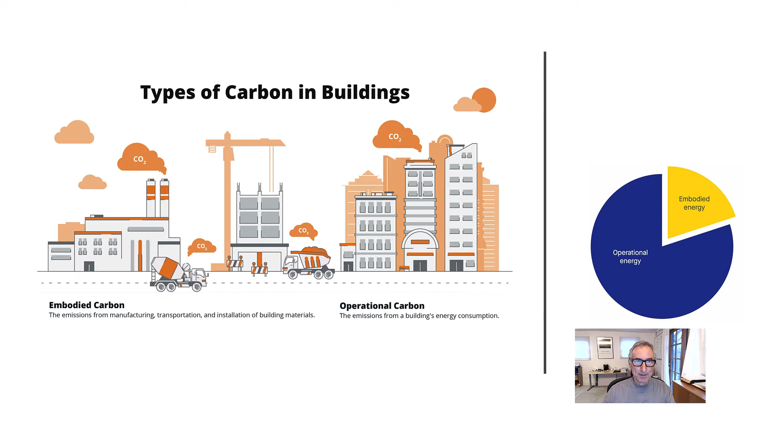In buildings, there are two sources or types of carbon emitted. One is from the construction of the building itself, which we call embodied carbon. The other is operational carbon, from the emissions of using energy in the building, either by burning natural gas for heating or using electricity created from fossil fuels. We're going to talk about both today.

Let me start with embodied carbon. It can be handled by looking very carefully at the building materials. We often find that the structural system is the single largest cause of embodied carbon. So when looking at buildings, we can investigate concrete, steel, and wood or other structural systems and calculate their embodied carbon.

You can see in this example for a 175,000 square foot office that embodied carbon can start around 30 million pounds for concrete, go down to the low 20s for steel, and below 20 for wood. In fact, wood itself sequesters carbon, and some people argue wood could even be a negative carbon impact.

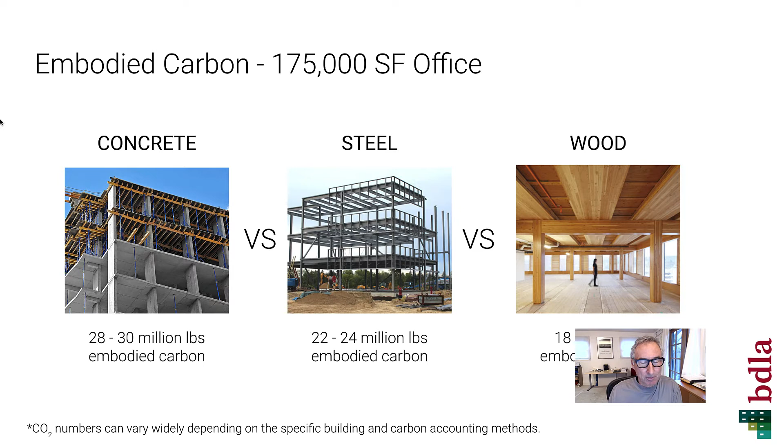If we're working on a building that has to be concrete or steel, there are steel and cement companies now making products with very low embodied carbon. They're consciously trying to figure out how to make cement that emits less carbon. Some companies are offsetting by running their operations with renewable energy, or, where fossil fuels are still needed for the process, as with cement, making sure they offset the carbon emitted in making it.

So generally, what we're doing to decarbonize embodied carbon in buildings is selecting low carbon building materials. At the end of the day, it's hard, if not impossible, to fully eliminate this carbon. So most projects take the remaining embodied carbon of the building construction and buy certified carbon offsets, ones that result in more renewable energy production, improved energy efficiency in buildings, and other benefits.

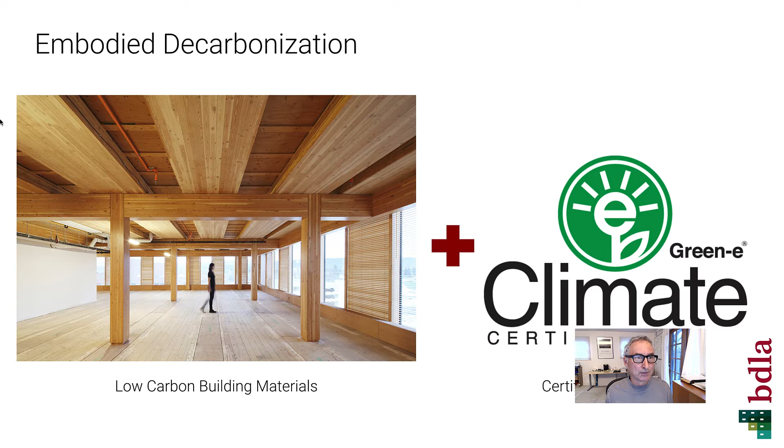So offsets are a way to do this. It's not as good as lowering the carbon itself in the building, but when it's a quality offset, it's considered a valid way to handle or decarbonize the embodied carbon of a building.

I'm going to spend the rest of the time talking about operational carbon, because it's the bigger of the two, and it's something we now have a clear path to handle. So what is the path to decarbonizing buildings?

If we look at a typical building, the first step is making that building more efficient. That more efficient building will still be served by methane, also known as natural gas, as well as electricity.

Then we take that efficient building and make it an all-electric building, substituting natural gas heating with electric forms of heating, generally heat pumps, which I'm going to talk about. Once we have an all-electric building, we can serve it with renewably produced electricity.

When I say renewably produced electricity, I mean solar or wind power. The solar can be put on the building itself, or we can purchase solar or wind power off the grid.

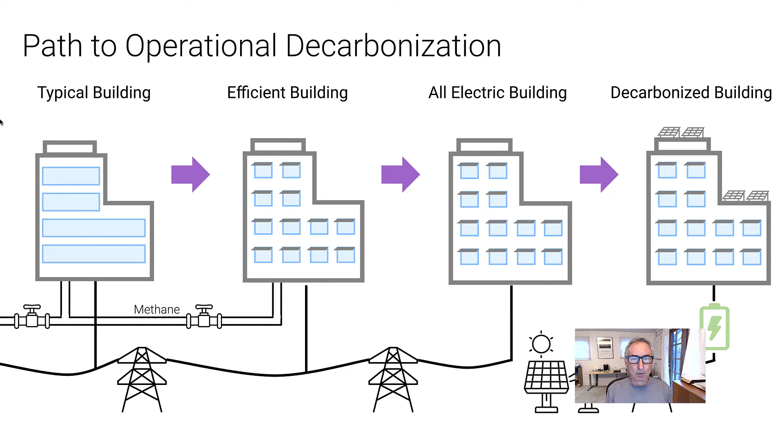So it's interesting on the building energy efficiency first step in this path. Buildings are generally getting more and more efficient. This is a graph showing that building stock has been increasing and is envisioned to increase. This is for the U.S. But the energy efficiency, measured in kilo-BTUs per square foot per year, has been improving over time.

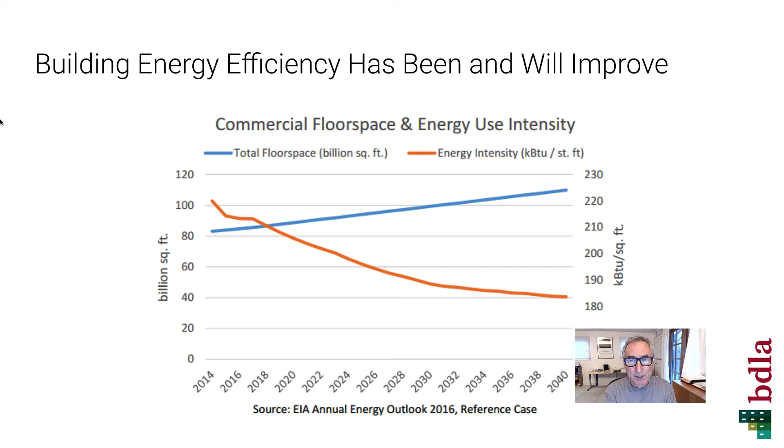And this graph on the left is up until 2021, actually measured data, or 2020, and then the rest is projected. There's been many years and lots of information available on building energy efficiency, but I'm going to focus a little bit more on some of the other elements today.

The first thing to understand is that carbon-free electricity is becoming more and more available. 170 cities in 8 states have already committed to providing 100% carbon-free electricity by 2050 or sooner. And several states are in discussion of being able to create or offer that.

One state, just as an example, that has not made a commitment like that is North Carolina. But in North Carolina, you can, through the electric utility Duke Energy, purchase renewable electricity. Most states and most utilities have an option where you can purchase renewable electricity. Some states have a program called community choice aggregation, which makes that easier, but we're seeing this as a rapidly growing thing—so that the money you pay in your bill, part of it pays for the wires and distribution of electricity, but the part that pays for generation goes to solar or wind farms.

So how do we electrify buildings, and what does that mean? Well, it's actually fairly straightforward. There are 3 places where we're using fossil fuels in buildings that we need to electrify. The first is space heating, and that's the biggest. The second largest is domestic hot water heating, and the third is gas cooking.

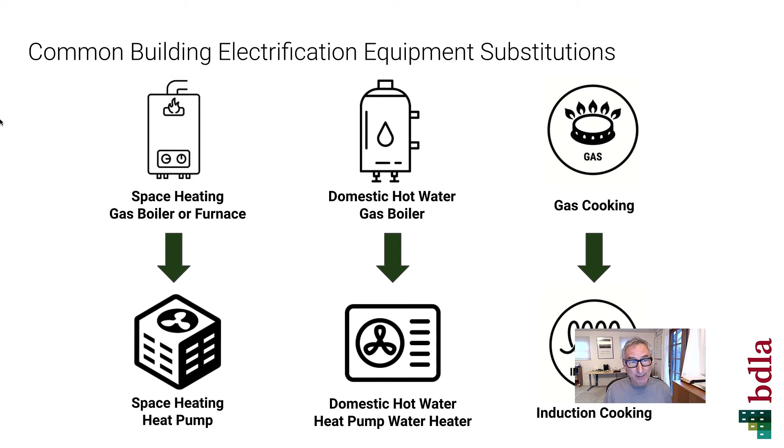There's also historically been electric resistance cooking, where the surface gets hot and you see a red element glowing when it's heating. But induction cooking is the newer version of electric cooking—it uses a magnetic field, and the surface doesn't get hot, the pot gets hot. It cooks very quickly and precisely, and it's the most efficient way to cook, around 80% efficient, where gas cooking is only 30 to 40% efficient.

So jumping into this idea of heat pumps: with a boiler, we burn gas. Some of the heat gets lost in the exhaust, and the rest provides heat. So for every unit of heat that goes into a building, we have to put in, on average, around 118 units of energy, fuel, in the form of natural gas.

With a heat pump, we use a refrigeration cycle, the same way your air conditioner or refrigerator works. A heat pump is able to pull heat from the air, the surroundings, and with the refrigeration cycle, turn what might often be cold outside air into higher temperature heat, and provide that into the building as heat. And because it's just moving heat, for every 100 units of heat we need to provide to the building, we only need, on average, about a third of that—33 units of electricity in.

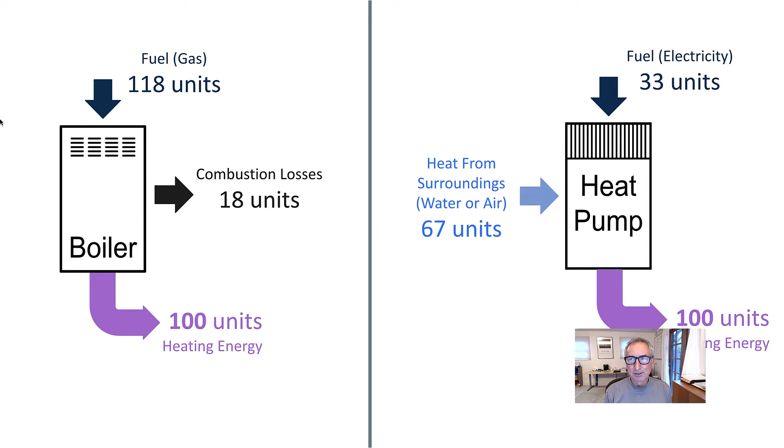So heat pumps are significantly more efficient. When we look at the resource-to-room efficiency of a heat pump: when we're using natural gas and burning that in a building, again it's this 118 units in for 100 units of heat out. But if we're using natural gas in a power plant and then put that electricity produced in the power plant into a heat pump, we only need 74 units of energy in. So natural gas is actually better used in a power plant connected to a heat pump.

But really the best by far is when we use renewable electricity—renewably generated electricity in the form of solar or wind—and we deliver that to a building and use a heat pump. In that case, we only need 35 units in.

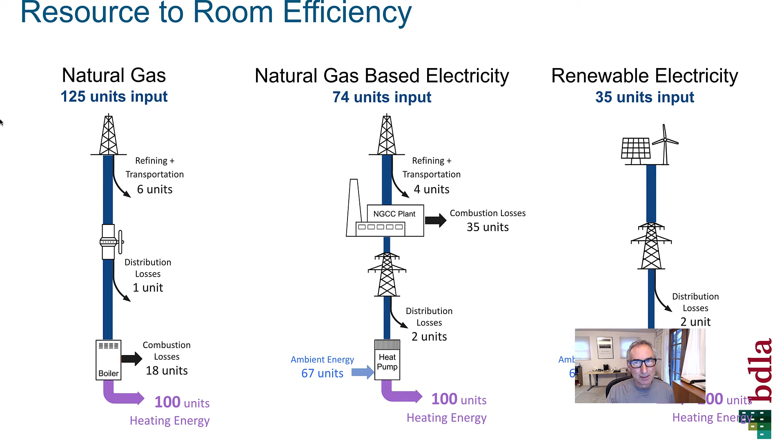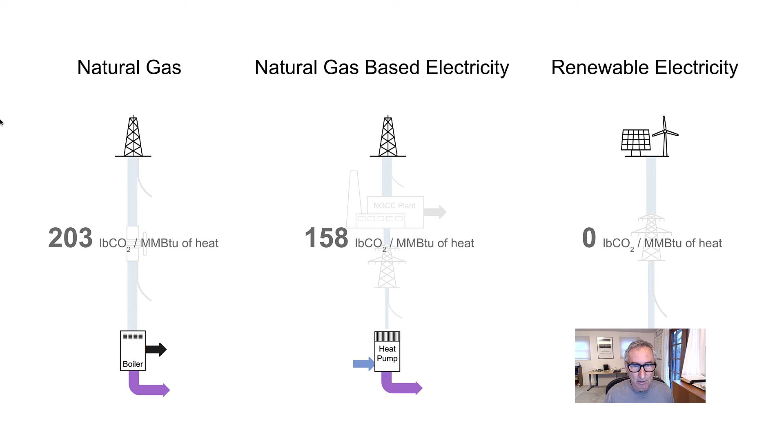So you can see we're cutting the energy input to produce heating down by over 60% when we're using a heat pump connected to renewable generated electricity. When we look at the CO2 implication of these three options, we can see that by far the best is renewable electricity, where we can get it down to zero. Natural gas-based electricity is a significant improvement, but still does have the carbon emissions, which we are trying to get rid of.

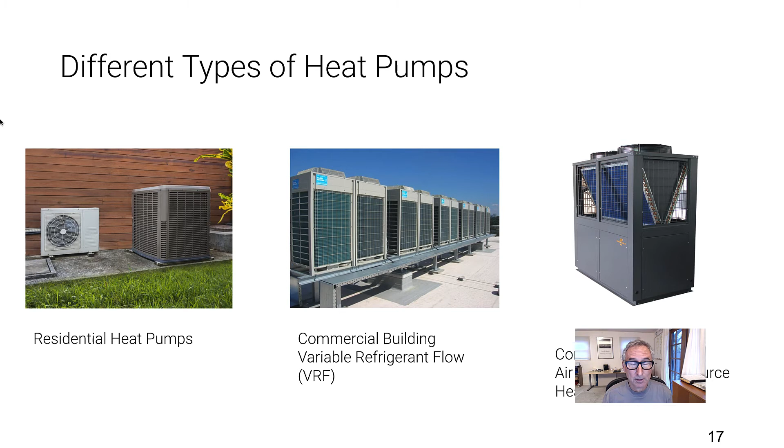The commercial building version of that is a variable refrigerant flow system, also known as VRF, and it's becoming widely used around the U.S. And then there's larger commercial, industrial, what we call air source or water source heat pumps that are just dedicated to producing hot water for a variety of different things, including domestic hot water in a large apartment building. So electrification is fairly straightforward. The technology is there. Electrifying and decarbonizing buildings operation is now a fairly straightforward thing.

So what policies are now being implemented to encourage electrification? There is a strong motivation to move in this direction. I live in California. In this year, 2021, 2.5 million acres were burned, in large part because we have an extended drought and our forests are very dry. But we're seeing now floods in a wide variety of places. And I can also remind you that there's been lots of different floods around the U.S. in communities, including New Orleans and Houston.

Insurance companies are now very concerned that weather-related insurance claims are skyrocketing, and there is a lot of discussion of how insurance companies are going to handle this, and it really does threaten the existence of their business model altogether. So this is something that is not just a belief or not, but it's actually measurable, and companies are starting to respond.

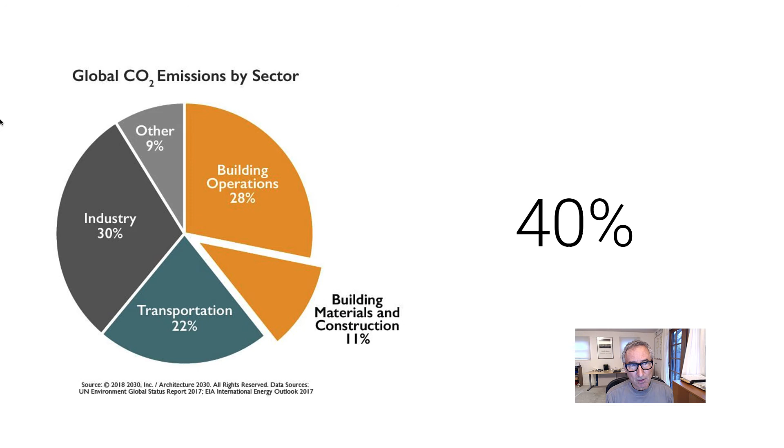Globally, 40% of CO2 emissions are connected to the building sector. Part of that is building operations, and the other part is building materials and construction. So really, buildings are the most important part of reducing carbon and handling the climate crisis.

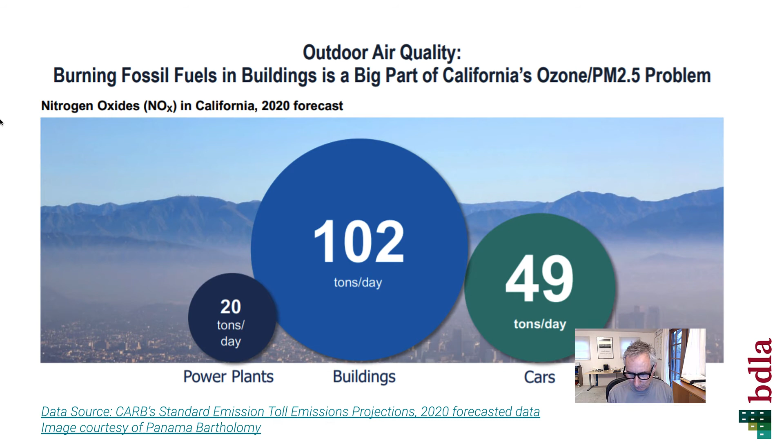I would also say that the burning of fossil fuels in buildings does have a negative impact on air quality. This is a graph of the emissions from buildings as compared to cars in California. And this shows that buildings, and that is the combustion of natural gas in buildings, has a larger impact than driving cars. When we burn natural gas, it not only emits CO2, which is bad for climate change, but we're also emitting NOx, nitrogen oxides, ozone, and PM 2.5, which is particulates that are very unhealthy to breathe. So burning of natural gas has a direct negative impact on our health today.

Another interesting thing is that with natural gas, we're now learning that when we drill for natural gas and then transport it to cities or buildings, there is a certain amount of leakage that occurs, and it's in the neighborhood of 2 to 3%. The unfortunate thing is that natural gas, when it is emitted uncombusted into the atmosphere, is 84 times more potent than CO2 as a greenhouse gas. So when this 2 to 3% leakage occurs, it almost doubles the greenhouse gas impacts of natural gas.

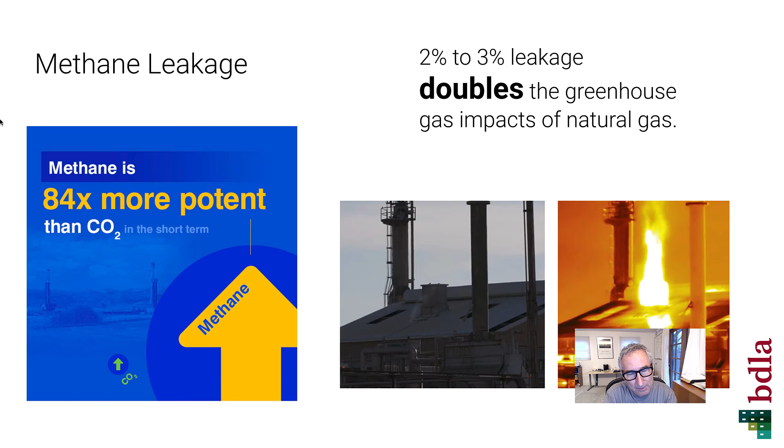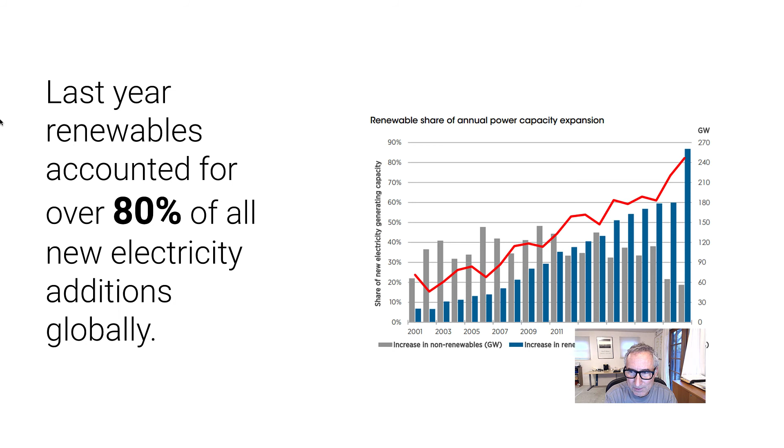So another thing that's coming into play here is the fact that renewables, solar and wind, have become very affordable. Globally last year, over 80% of all new electricity was from solar and wind. And you can see this red line on the graph on the right is the share or percentage of new generating capacity that's added to the grid each year from renewables, and that's only grown over the last 20 years. So now it is the single largest source of new electricity. It's beating out natural gas power plants, it's beating out coal power plants, and so we're seeing the use of renewables grow very rapidly.

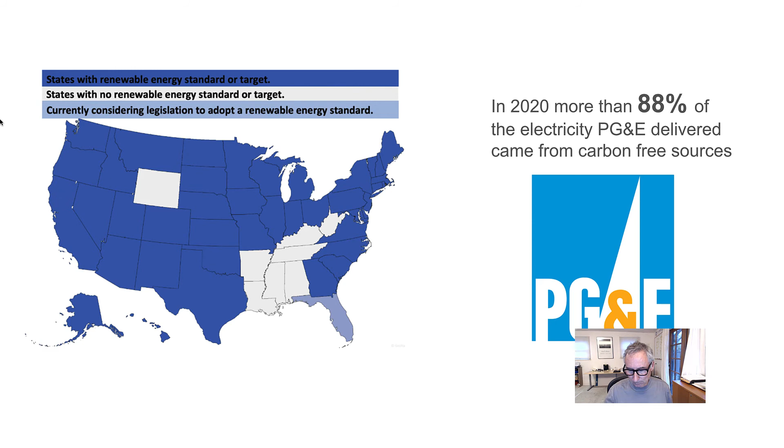In 2020, the electric utility in Northern California called PG&E delivered 88% of its electricity from carbon-free sources. Also, large companies are making a move to use renewably generated electricity and make commitments. There is a program that the EPA sponsors where you can voluntarily sign up to get a growing percent of your electricity use and energy from renewable sources.

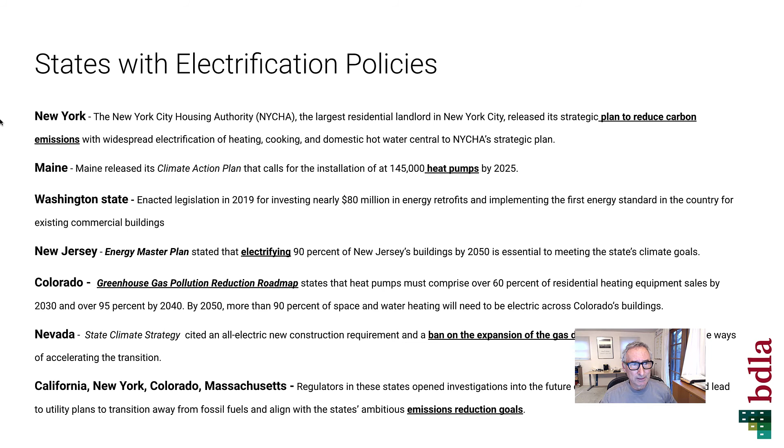So there are lots of states now that have policies towards electrification of buildings, and several cities are now putting in place sets of policies that will require reductions of greenhouse gases from buildings. So the market for heat pumps is growing, and the same with electric buildings. You'll see that these pie charts are showing the source of heating for residential buildings. And in the South, electric heating, much of it heat pumps, is already coming from electric sources. And in the West, Midwest, and Northeast, it's a much smaller percent, but that's going to be growing over time. And natural gas for heating is going to be shrinking.

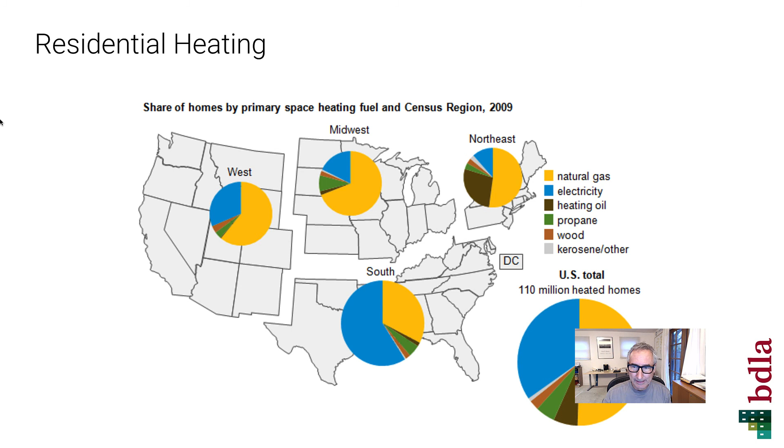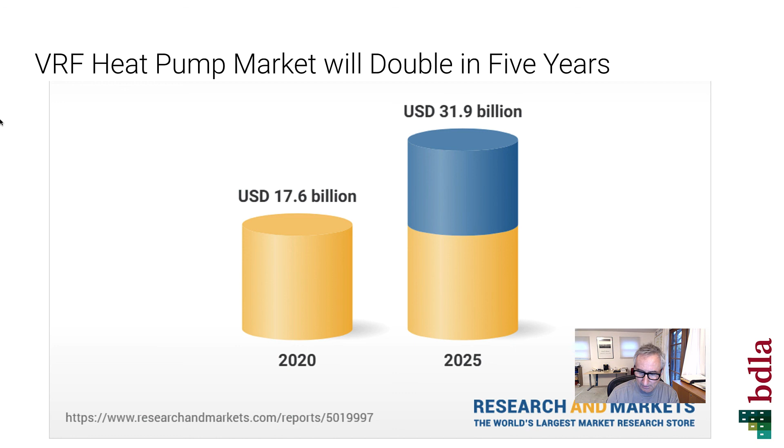When I talk to folks who sell natural gas equipment, they're all now moving into the market for heat pumps and starting to sell heat pump systems. The heat pump system market, for one example here, the VRF market, is expected to double in the first 5 years of this decade. And so people are taking note.

So I'd like to end with just a couple thoughts about building decarbonization. I think the first thing to remember is what are building occupants looking for? They don't really care if the heating is provided by natural gas or by a heat pump, but building occupants want comfortable environments that enable productive work and a sense of well-being, or at your home, the ability to relax. So we really need to look at the outcome, and that is comfort in buildings, and we can provide that comfort with electrified buildings that are powered by renewable energy.

I'd also like to bring up the fact that Black communities do bear a disproportionate burden of the continued use of fossil fuels. That's borne out in a variety of ways and is caused by a legacy of harmful building policies and practices, and also where we put fossil fuel refining facilities and such.

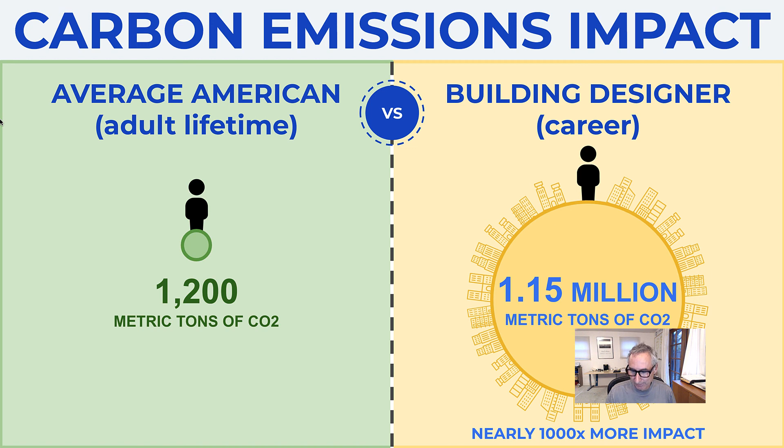And I'd also like to remind those of you who are listening to this video, if you're involved with building design or construction, or plan to be, that your ability to have an impact on greenhouse gases is far, far larger than just an individual. This comparison here is showing the carbon emissions of an average American over their lifetime, as compared to a building designer over their career. And it's usually in the neighborhood of 1,000 times more impact as a building designer. So if you want to make a difference, if you want to address climate change through building decarbonization, you have a very, very strong role as a building designer or a builder.